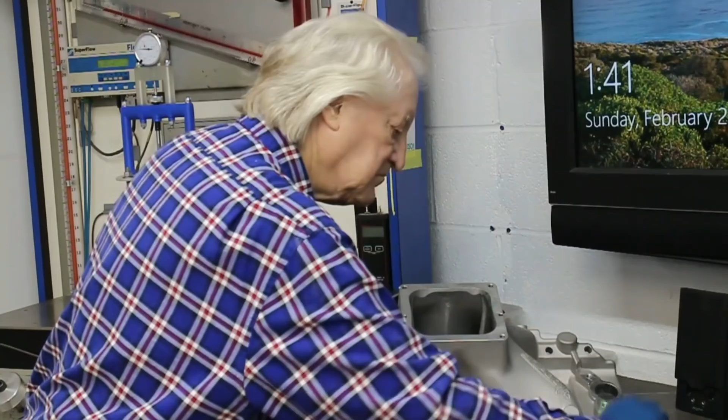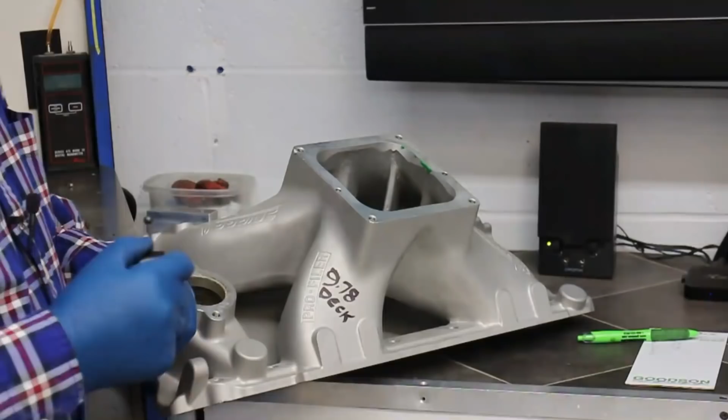So what was I doing in our opening shot? Well, I'm poking around inside this Profiler Sniper Junior manifold. It's a big block item, and I'm just collecting the data on the runners to go with the dyno testing we've done.

Now I can tell you right now, save you all the anxiety of wondering what big block manifold to choose for a single 4-barrel Dominator. This is the one you need, right? I'm going to be doing a video on it down the road, but anyway, that's not the subject of our talk here. So let me tell you what this is all about.

Well, the subject material for today, let me kind of bring it online with a little story here. The name Richard Holdner should be familiar to anyone that's a true hot rod enthusiast and likes to see the results of dyno testing. Richard's MO for years has been doing articles and videos dedicated to just saying what's the difference between this and this on the dyno, and he does an excellent job. One of the exceptions to the rule was a video over several subjects, but it started off talking about the coefficient of discharge of an intake or exhaust port.

Now, sometimes that's called just the discharge coefficient. Anyway, what he did in this story, and it's on YouTube, just put Richard Holdner in the search engine and you'll find dozens of videos by him. He started off with a brief description of what the coefficient of discharge is, and so that kind of dialed the viewer into what he was talking about. But he had other things to talk about as well,

I often tell people that the job of a porter is essentially to get air to go around corners that it really is not too keen on going around. The more skilled that porter may be at that, probably the more horsepower his cylinder heads will make. Now, granted, there's more to it than just that. But what we have to consider here is what are the limits of the flow that can be had through an essentially perfect port. Well, this weird looking device here is going to tell us what we need to know.

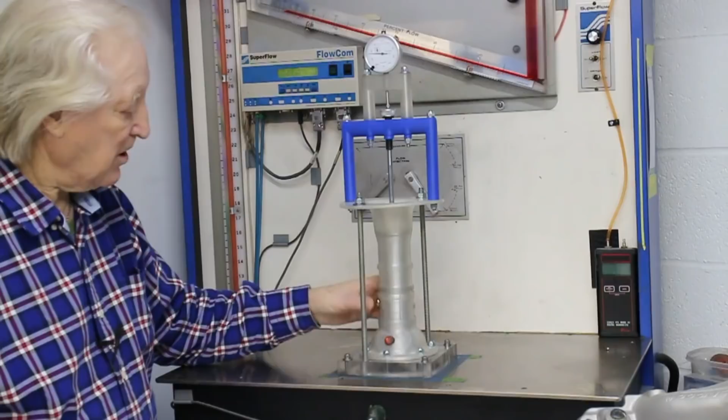Essentially, it's a straight port. In other words, it's got a 90-degree downdraft angle. The valve is down here. This essentially is the valve stem. This around here represents the combustion chamber in unshrouded form. Right, and what we're going to do is progressively open that valve and see what it will flow. How do we know how much it should flow if it was perfect? That's quite simple, but we'll get to that in a moment.

Now, there are no restrictions to this other than the valve itself. The port is perfectly straight and streamlined in a Venturi-like manner, right? So we should get some pretty good flow numbers from it. Now what we need to do is to compare that with perfect. What's perfect? Well, that's quite easy to demonstrate here. The first move we should make here, I think, should be the definition of our units that we're going to use, so that those of you who are not too familiar with flow bench terms and techniques get brought into the picture.

First, let's talk about the test pressure units that we're going to use. When I talk about test pressure, I mean either the pressure or the suction we apply to the port so that we have what we call a standard pressure drop. In other words, if we're going to suck on the port or blow on the port, depending on whether it's intake or exhaust, the convention is that we have a certain test pressure.

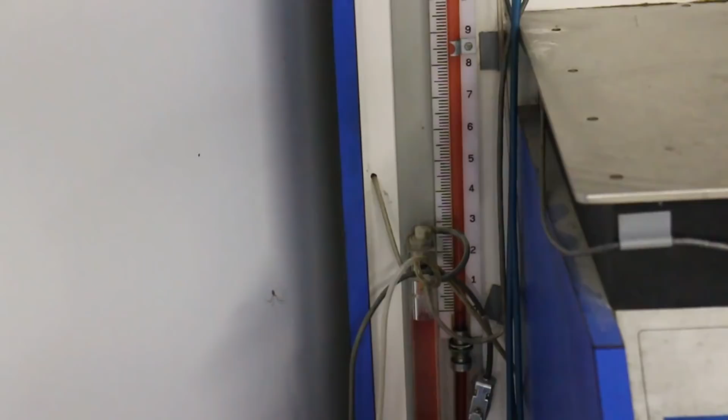It's actually an oil one for a flow bench so that it doesn't get all messed up over time. But let me show you on the flow bench where that column is. Here is the side of the flow bench. If you look to the right of the red oil column there, you'll see a scale. And as we go up, it gets more and more until it tops out. It's something like 40 inches.

As you most likely saw, the column we're talking of here is red, and it's actually oil, not water. Also, the inch graduations on it are actually bigger than a real inch. That's because oil is lighter, so the scale has to be bigger to compensate. But anyway, let's move on to the next topic, which is what constitutes a discharge coefficient of 1.

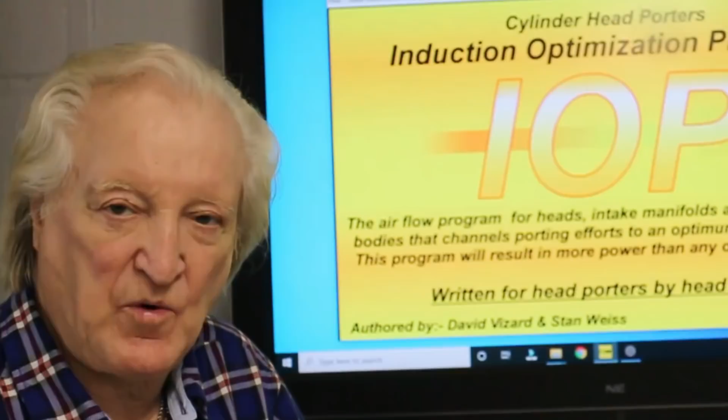That means that, in essence, whatever we're testing is 100% efficient. If the discharge coefficient was 0.9, then it would be 90% efficient. Now, how do we come up with a number for 100% efficient? I won't go into all the details of how that number was arrived at, because I'm not here to teach you fluid dynamics, a university course.

What I'm here to do is to tell you how we arrive at this number as it pertains to cylinder heads. Basically, we find that if we draw a pressure or vacuum of 28 inches of water, then the amount of airflow per square inch of the orifice being tested, or the test subject, will pull through 146 CFM. That will represent a 100% efficient port.

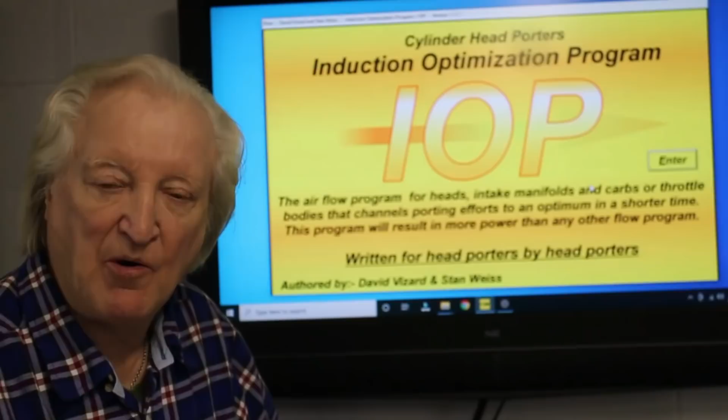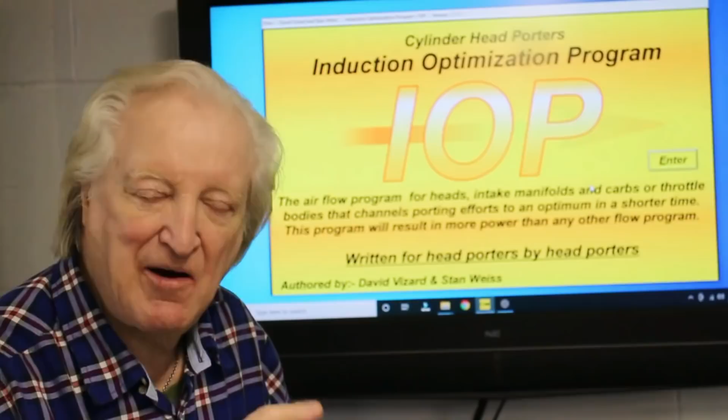So that's our goal. With the aid of the IOP program, I'm going to demonstrate how we can see what a 100% flow efficient port is and compare it with what we actually get. So let's just check that out. Our straight port test piece has a 2.02 intake valve. The relevance of this is that this blue line here

represents a lift of 0.25D. That is 1/4 of 2.02, which comes to 505 thousandths. Now that is a critical number. The orifice size we measure, per SAE standards, increases until the valve gets to 0.25 of its diameter in lift. At that point, all the orifice area that can be presented to the cylinder has been. So any lift further than that presents no more area.

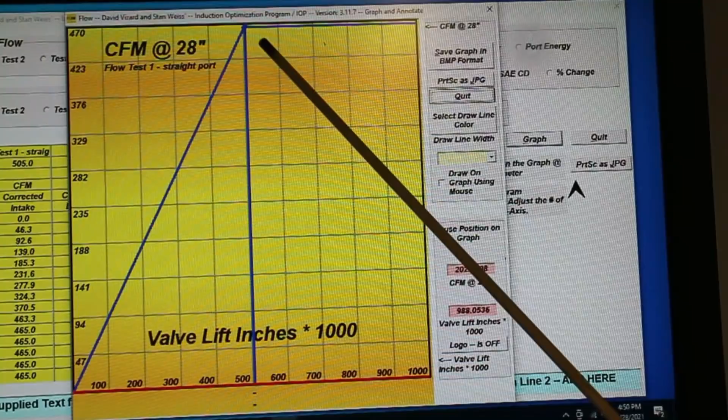So if we have 100% flow efficiency, the curve looks like this. It's a straight line until 505 lift, that's 0.25D. If we had a 3-inch valve, we would be looking at 0.75 inch for this lift curve. But on our particular test one, it tops out at 505. And since no more area is available, the flow should top out like this. So this is our 100% efficient curve. You'll see that that valve should flow approximately 465 CFM at 505.

Bad news is that even with the straight port we have, it doesn't match that. So let's have a look and see where our straight port actually goes in terms of flow efficiency. On to our next graph. Here is our 100% efficient line.

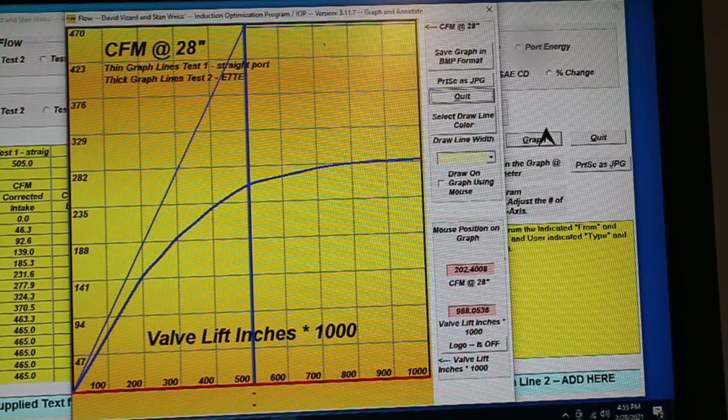That's a discharge coefficient of 1. And here is what our straight port, as you just saw on the flow bench, delivers. You can see that what we could theoretically obtain and what we actually achieve are substantially different. Now then, that's our flow curves. So let's now look at our discharge coefficient curves. That is the efficiency with which our rig is utilizing the space that it has to flow through.

Here we can see that we have a discharge coefficient of 1. Here is our actual discharge coefficient. Right, so you can see even with a straight port and a valve that is tulip shaped, this is typical of what we can expect. But that doesn't mean it can't be improved on. That is a basic parallel port.

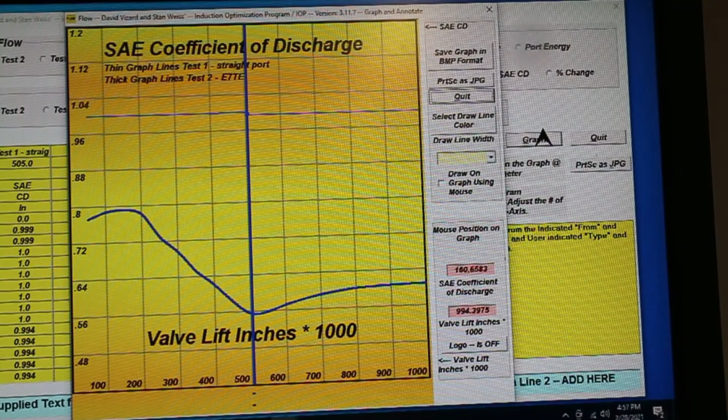An airflow, the form it requires to make the best discharge coefficient, is never obvious, especially when we put a curve in the port as we need to for cylinder heads. If it was simple, we would not need a flow bench. So we can sum up our discussion on the coefficient of discharge by saying that essentially it's just a measure of the port's efficiency, or the port and valve entity's efficiency to flow air.

It won't take much thinking to realize that the most influential aspect of a port and valve system is the valve itself. We can make the port any size that we wish, but we're restricted on the valve by how much room there is in the cylinder. So we could have a system which has a high discharge coefficient by virtue of a massive port feeding the valve that's limited in size by that bore. Let me make an example here.

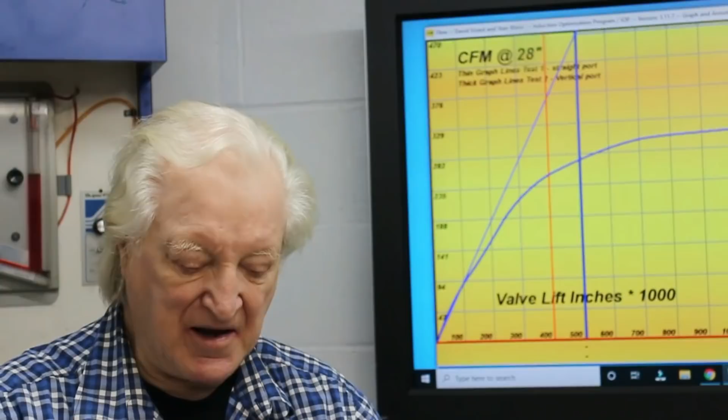Imagine a bucket, you know, a big one, this diameter at the top and this diameter at the bottom, and in it, at the bottom, it's got a valve 2 inches diameter. Let's say that valve is very streamlined into the seat and out of it, so it's as close to a perfect valve as can be had. So we now flow test that, and we'll find that it has a very high discharge coefficient. But would a port the shape of a bucket with a valve at the end of it actually make power? No. The port velocity is so slow that it has no ramming efficiency, and it will backflow very easy.

Now, it's been said by a lot of people, mostly people who have never designed a cylinder head or an engine, that the internal combustion engine is a simple air pump. No, it's not. If it was a simple air pump, we would have conquered all of the challenges that it presents us years ago. No, it's a very complex air pump, right? So the next time you hear that an engine's just a simple air pump, it's something of a cliche, and it's probably written by somebody who hasn't given this any thought further than what they've heard somebody else say. But let's get to the point here.

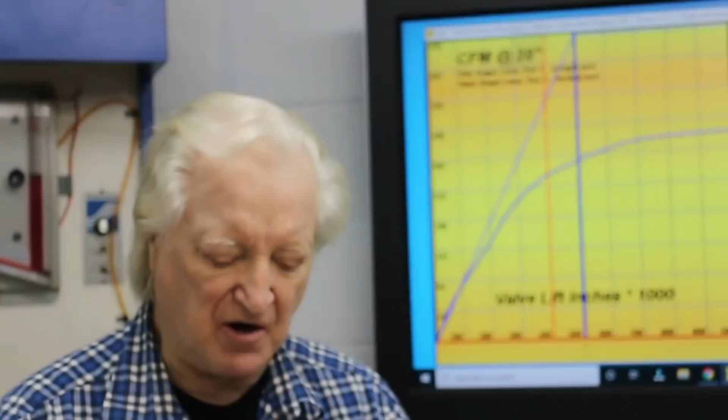We need to have a port that not only flows a lot of air, but also does it from the point of view of efficiency, not from the point of view of size. Now that excludes the valve, right? So when we cut ports in a cylinder head, we have to cut the port to a shape that flows efficiently, and not one that flows those big numbers due to its size. So we should have learned two things here, right? We need airflow, and we need to generate that airflow efficiently. That is the crux of the matter. So that is our coefficient of discharge, how efficiently the port works.

Is that everything we need to know about a port? No. And let me go into that now. So we know about CFM, and we know, if you've taken everything in here, roughly how important the coefficient of discharge is. But is that anywhere near the end of the line with understanding ports?

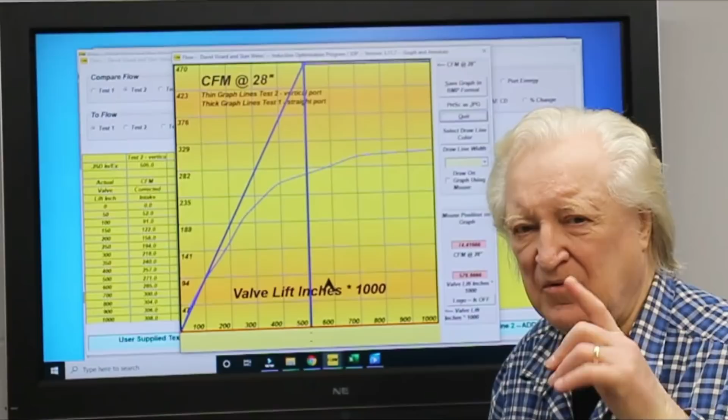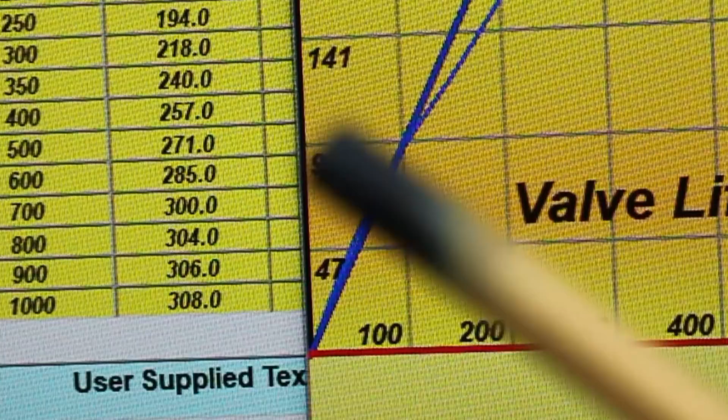Unfortunately, it's not even close. What I want you to do here is to make note of this section of this graph here, and I'll zoom in on it so that you can see it closely. If you look very carefully, you'll see the flow curve of our vertical port actually exceeds the line representing 100% efficiency. So how do we get that line there to be greater than 100% efficient?

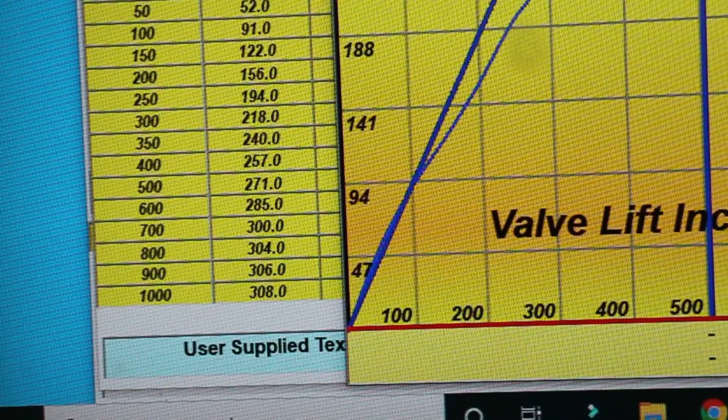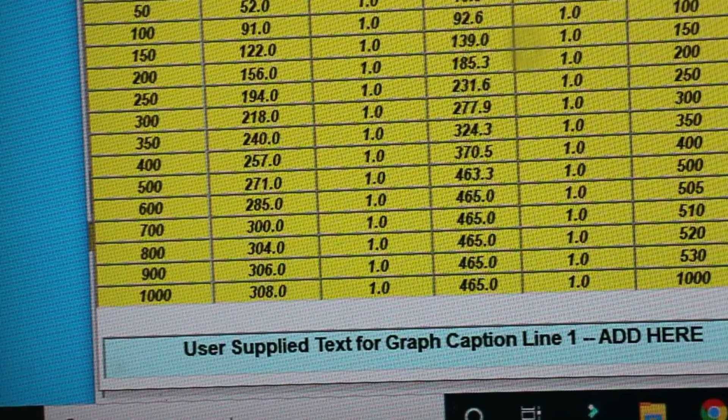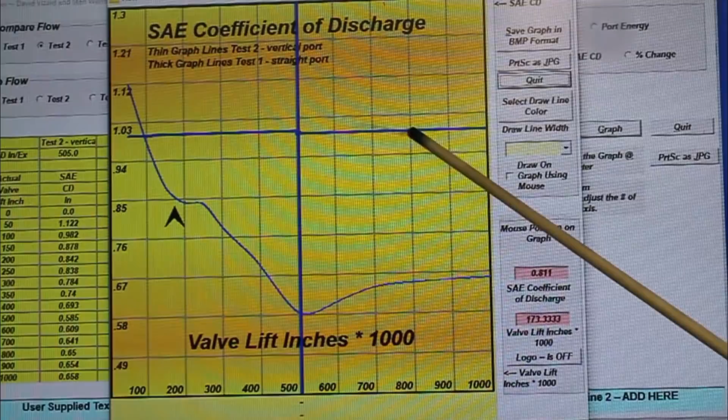Now it's not showing up very well here because of the scale of the graph, but what we can do is switch to the coefficient of discharge graph and see what the difference is. Here's our coefficient of discharge curve. This is our 100% efficient curve. As you see, it's a straight line.

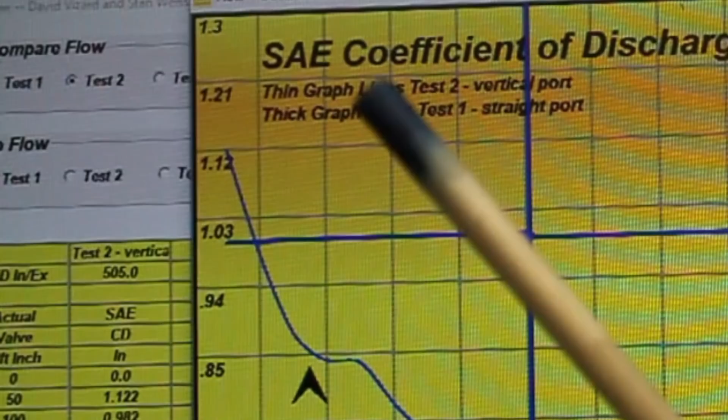Here is the curve for our vertical port. Look at this. It's 112% efficient here. How did that come about? Let me explain. So how do we account for this 112% efficiency here? The answer is quite simple. Pressure recovery. Two words. But exactly what does that imply?

Well, if we look at the seat design up close, we see that it actually resembles a venturi. And a venturi's principal characteristic is that as the velocity increases in the minor diameter of the venturi, the pressure drops. That's how a carburetor works. But as it leaves there, it recovers that pressure as it slows up. So it converts velocity energy, kinetic energy, into pressure energy. And this is what's happening here.

Now this is just one characteristic of an intake port or an exhaust port that is rarely talked about. You may find it in university books, but outside of that, not so. Now the thing is, we can have this pressure recovery in a port at 1, 2, or 3 points in the valve lift, depending on how effectively we've designed our port. So I've covered the discharge coefficient here, but that is certainly not the end of the line. We have to deal with things like pressure recovery, velocity, kinetic energy, the kinetic energy density in the valve, just to name but a few, and wet flow and so on and so forth.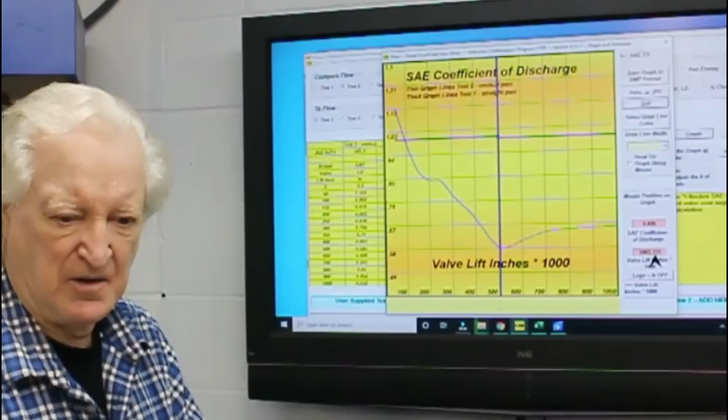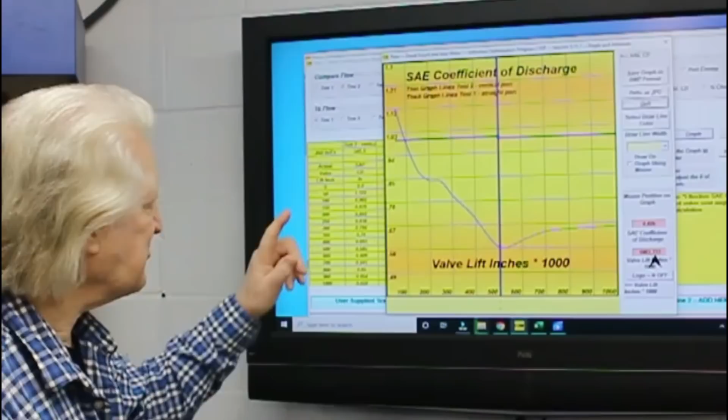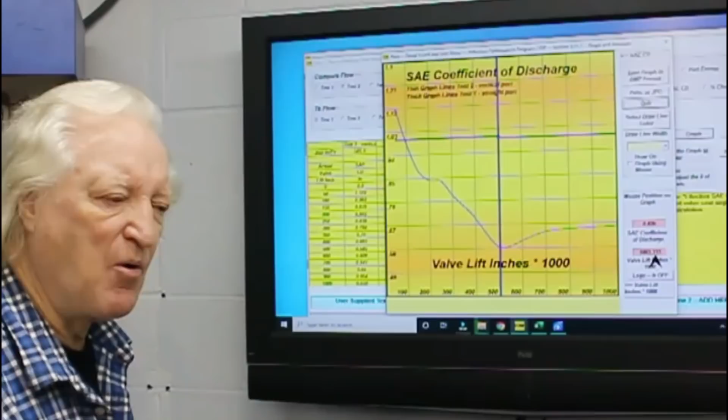So port design is not just a simple thing. That's where I mentioned whoever said an engine's a simple air pump is probably not educated very well on the subject of engines. But anyway, if you want to learn more, then we are getting into the realms of stuff that is much more for professionals here. So I suggest at this point you take a look at the 2 videos I've done on this port program. But before we go, let me just show you the difference between these 2 ports in terms of velocity, port energy, and port energy density.

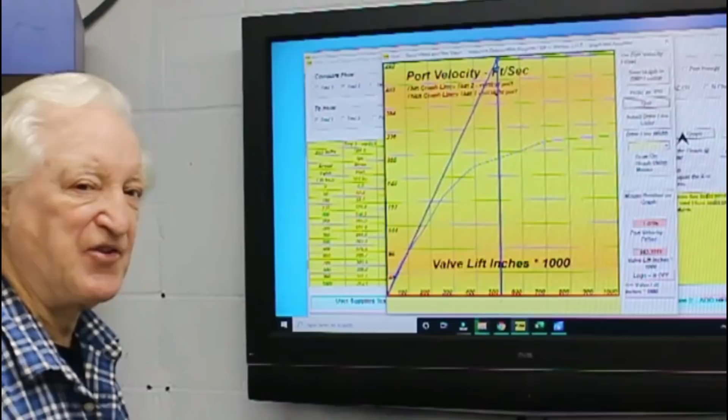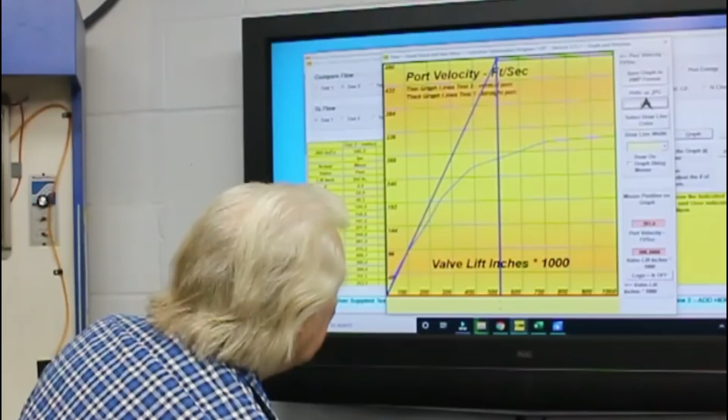So here we go. There's port velocity. Not surprisingly, it looks exactly like the port CFM curve. But that's because of the situation involved. Now let's look at port energy. Right, you can see our port energy for our perfect valve is way higher than for our actual vertical port. So you can see we've got a long way to go to achieve parity with it.